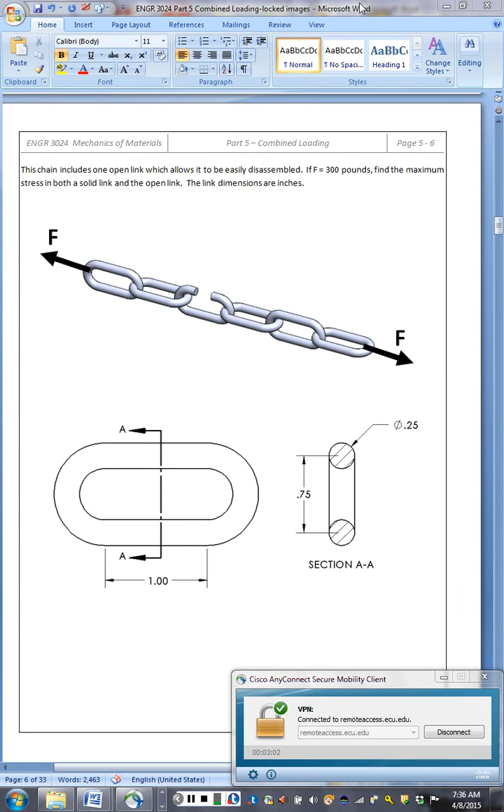Alright, this combined loading problem will look at two different links in this chain. First, we'll analyze the solid link. And then we will look at what happens with the open link right here.

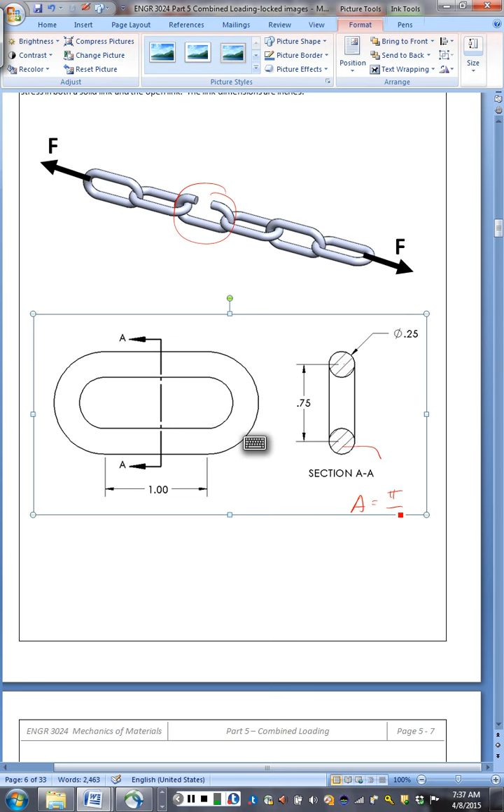So we'll need some section properties to do the analysis. This is a cut view of the face. See the diameter of the actual body of the link is 1/4 of an inch, which gives us an area of 0.0491 square inches, and we have a section moment of inertia, pi over 64, d to the 4th, 191.75 times 10 to the minus 6 inches to the 4th.

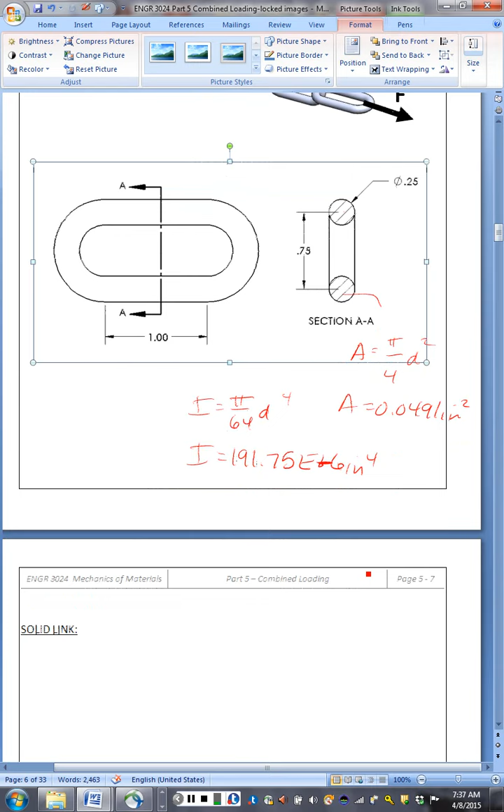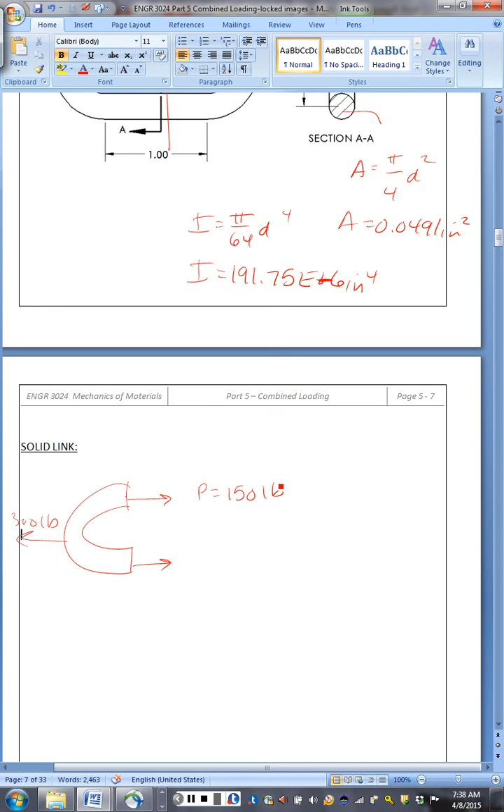So looking at the solid link, if we take a section as designated at AA, we end up with a C-shaped portion. The applied force to the entire chain is 300 pounds. So we have that aligned along the center line, 300 pounds. We know that each half of the link is going to have an internal force, and by symmetry we can see that that's got to be 150 pounds in this case. It's balanced, so that has that link in equilibrium.

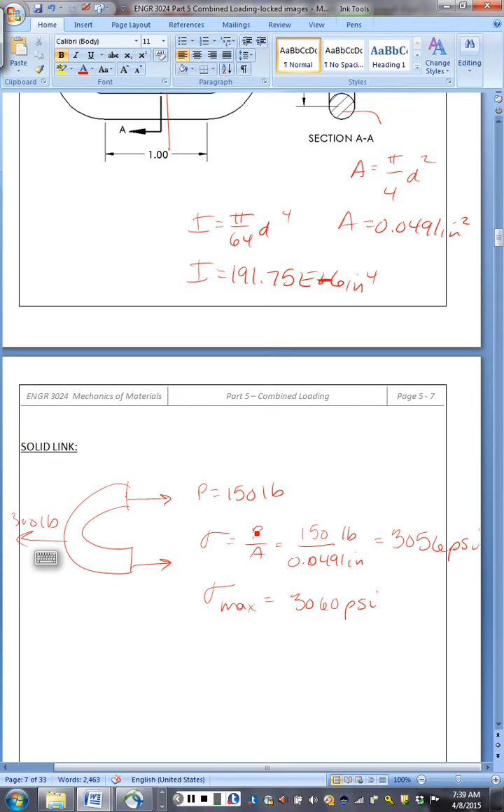If we have that load of 150 pounds, we then have an axial stress that's just the force over the area. And that is a little over 3,000 psi. In this case, again, it's symmetric in both sides, so the maximum is at 3060.

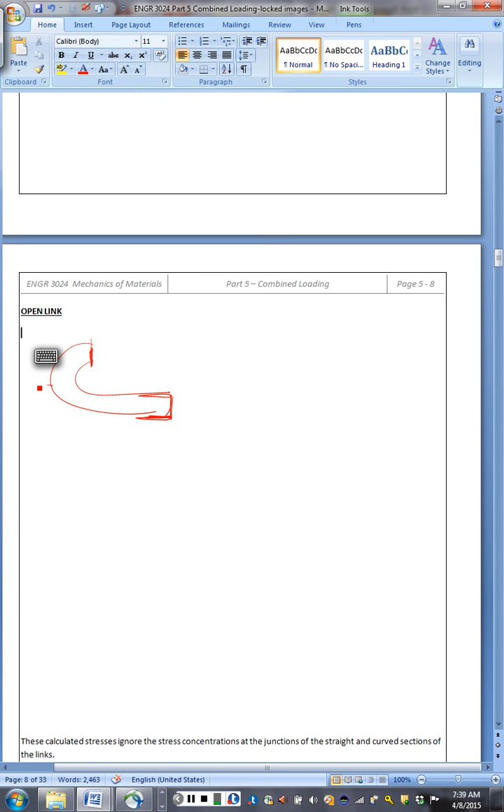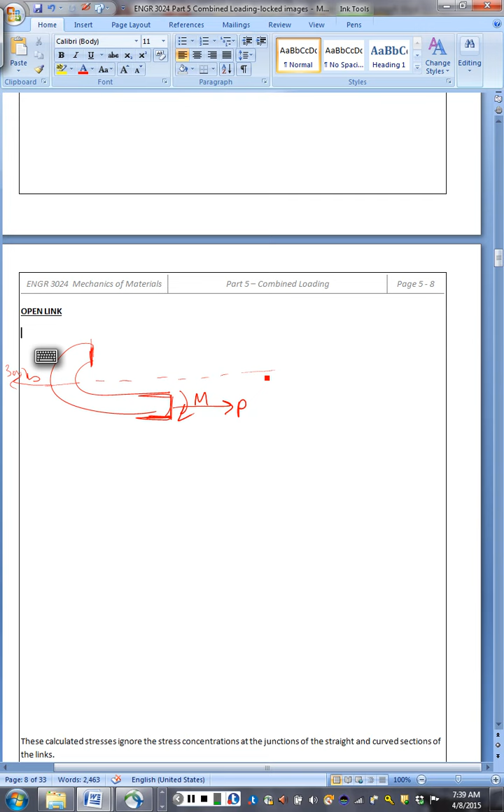Now, when we look at the open link, this is the free surface, and this is the surface on the bottom half where we would have the section at AA. We still have our 300-pound applied force in the vertical center that I'll indicate with a dashed line. But now this free surface cannot obviously develop a reaction force. We have our axial P, but in order to keep this in equilibrium, we're going to need a moment because of the offset between the line of action of the axial reaction at the section cut and the line of action of the applied force.

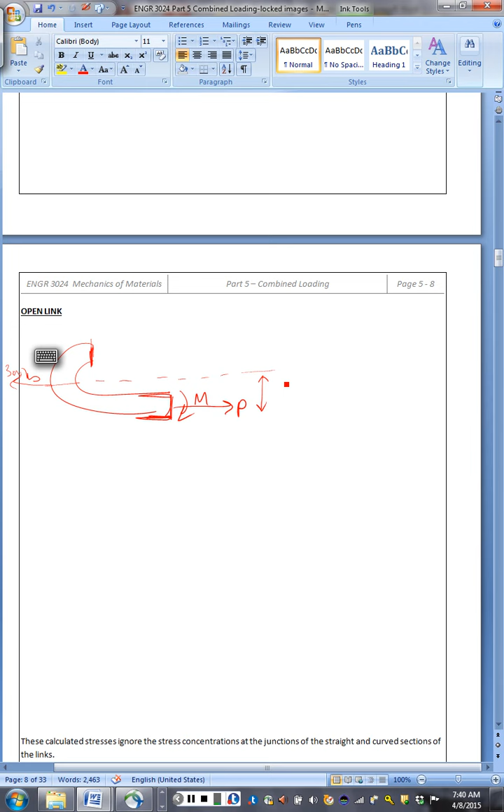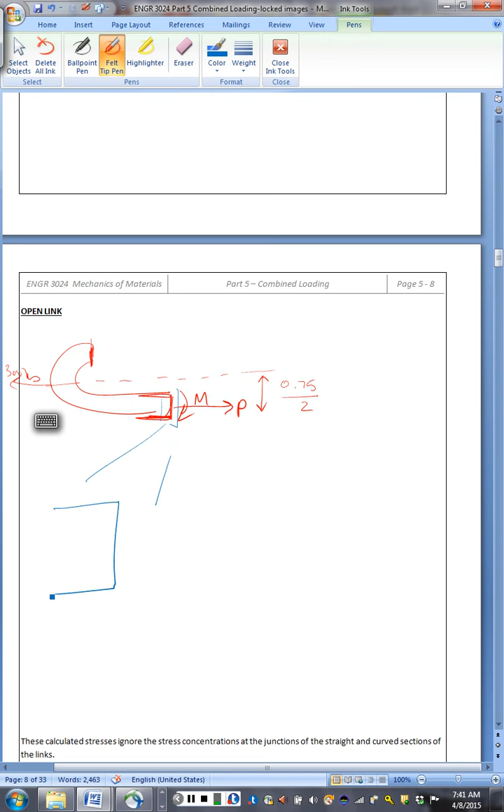Now that distance, the overall center to center of the link is 3/4 of an inch, so we know that this distance is half of that. We also know that this bending moment creates a normal stress, so we need to have a picture of the geometry of the cross section of this cut face. So taking sort of a larger view here, we have a neutral axis, and this dimension, which was the diameter of the link body, is 0.25. So our C is 0.25 over 2 inches.

Okay, so that establishes the geometry of the face, the geometry of the link, and now we need to calculate what these stresses are. For the axial load, in this case, we only have one axial load to balance, so instead of the 150 being split between both sides of the link, we now have the internal reaction force that is 300 pounds. So the stress that results from that is 300 pounds over the cross-sectional area of 0.0491. So now this time it is twice as much, a little over 6,000 psi.

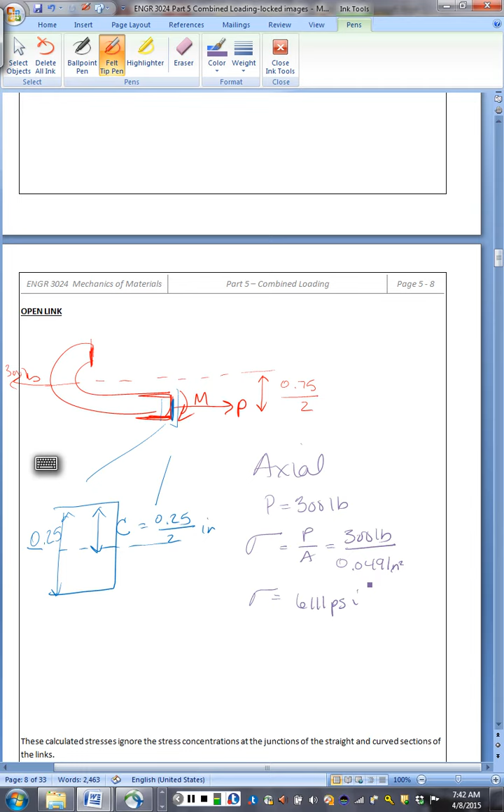For the bending, we know that the moment, reaction moment, has to equal the force times the distance between the lines of action. So that force is 300 pounds, and that separation distance is 0.75 divided by 2, or 0.375. So my reaction moment has to be 112.5 inch-pounds.

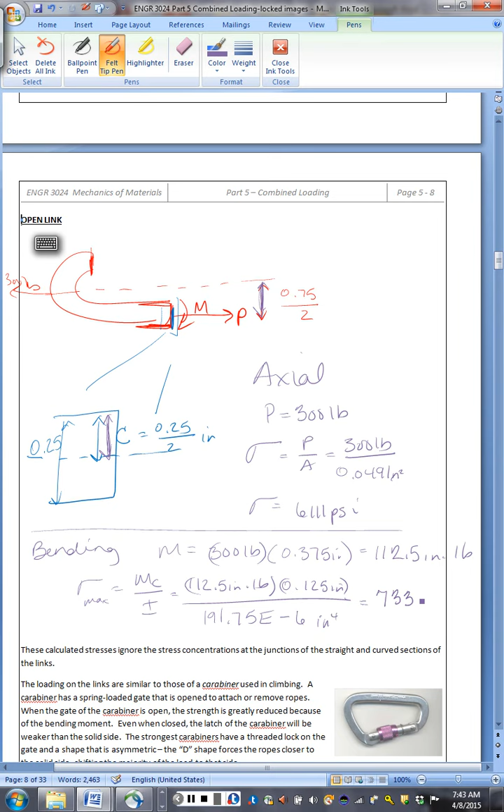Stress resulting from a bending moment, that maximum value is MC over the moment of inertia. So we have 112.5 inch-pounds. This separation distance, C, is 0.125 inches, and the moment of inertia that we calculated up at the beginning, 191 times 10 to the minus 6, and that is 73,338 psi. So much larger, an order of magnitude larger, and so your worst case scenario is going to be the total of that. Your maximum worst case has to be the combination of the axial and the bending.

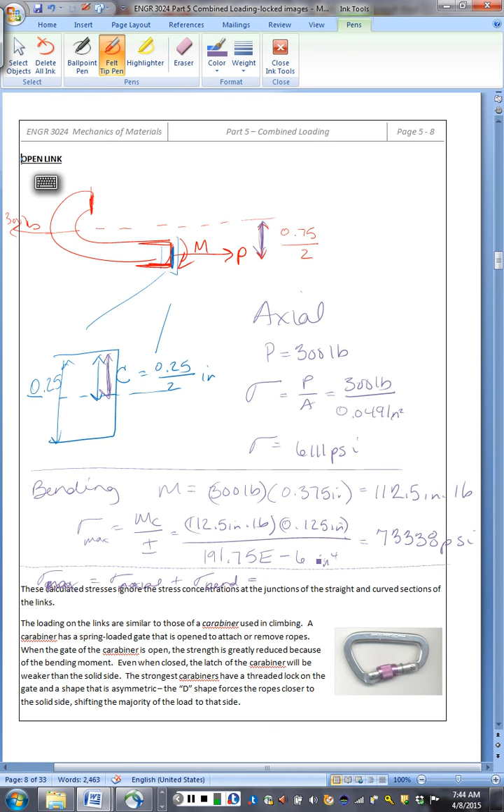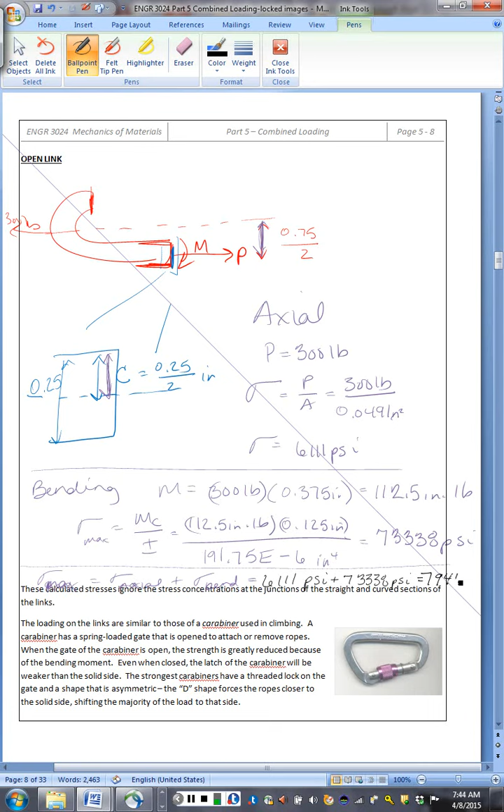So 6,111 psi from the axial loading, and 73,338 from the bending load is a total of 79,449 psi.

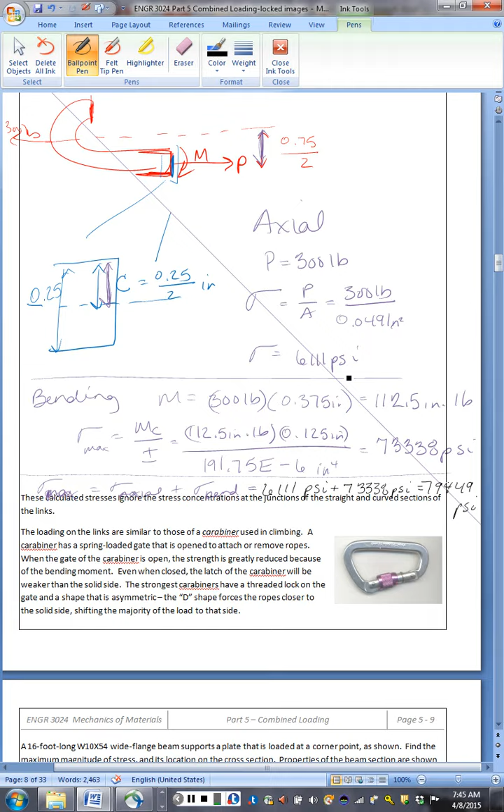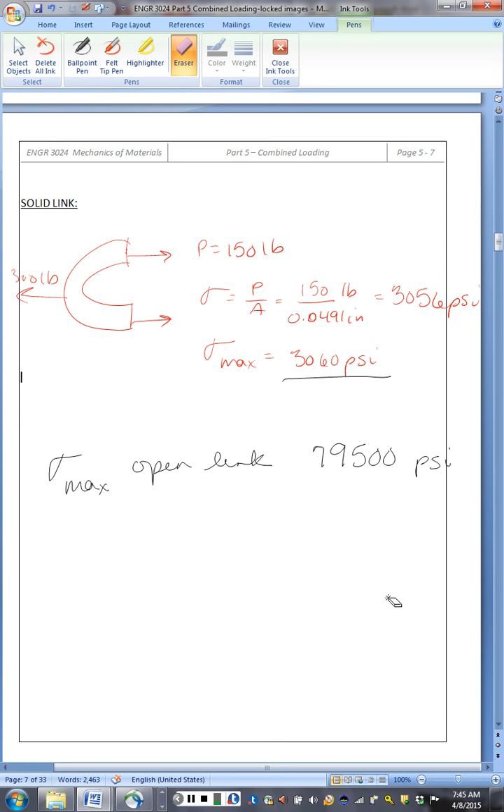So a vastly different answer than the 3,000 psi for the overall link. So for the open link, in summary, is almost 80,000 psi, and the maximum for the closed normal link is just over 3,000.